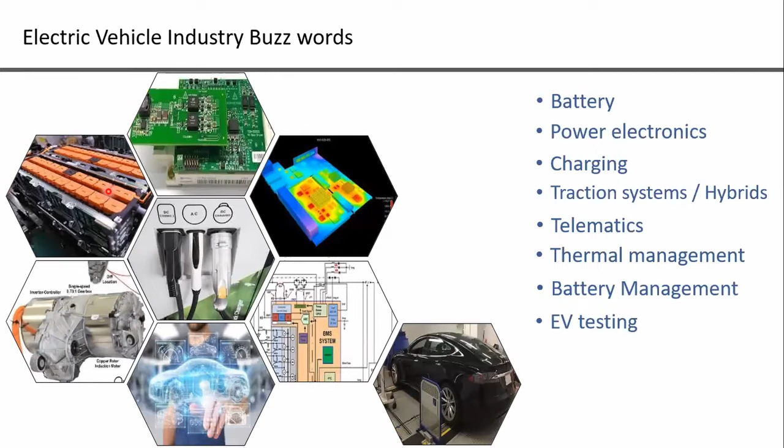Now, when you build an electric vehicle, you also need to test those vehicles. Some tests from an ICE vehicle continue to be applicable even for an electric vehicle, but apart from that, there are various other tests you'd do only for the electric domain—insulation and isolation testing, motor power testing, range of the vehicle because of limited battery capacity, and various EMI, EMC testing—very important in electric vehicle development. So all of those are areas you'd see coming up in the EV domain.

Important—grid balancing. Someone asked this question about charging at home in the last session.

I agree to the point that India in some states are having surplus energy, and some other states don't have energy even for the basic house. Even in Tamil Nadu, we have seen sometimes outages for 1 hour in a day during peak summers. This year, hopefully we're not seeing any outages. But one is availability of power.

The other important thing in India is the quality of power. It's not just related to availability, but how good your power is, the power factor, so that all the electronics I spoke about are very susceptible to the quality of power that goes inside. They are all three-phase AC, but if the leakage voltage or power factors are bad, you might end up not charging it, or you might end up failing the system much earlier in the process. So that grid balancing is one important thing.

Last but not least, like I mentioned at the start of my slide, we talked about battery. This is also a solution of battery, because you can't afford to put large battery packs on the vehicle. There are various solutions that have come up in recent times for allowing batteries to be swapped. So this is one of the batteries that you could remove and put into your vehicle, a two-wheeler, and take it off for running the next ride.

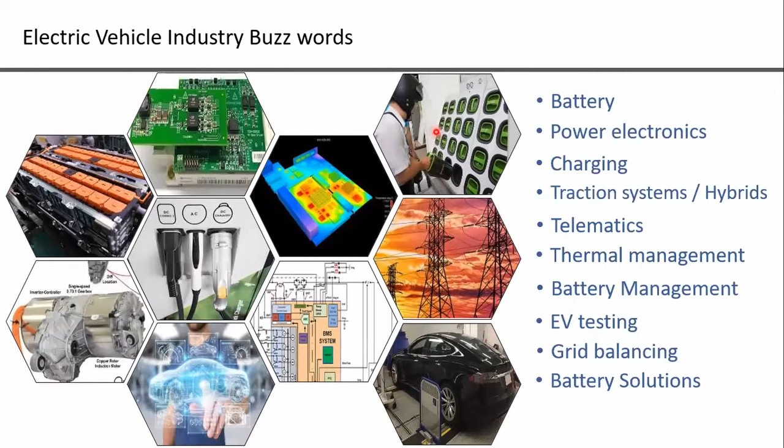Second thing is you are getting batteries for leasing. You don't have to buy the battery. You can lease it for 1 year, 2 years based on your capacity and your utilization, and you pay per use. So there are other various options that you're getting for battery solutions.

So if you look at hybrid vehicle designs, I'm not going to talk because this was well spoken in the last presentation. These are the various resistive forces that the vehicle sees. Now, if you're an electrical or mechanical engineer, the forces acting - rolling, aerodynamic, grade, accelerations - they don't change, whether the wheels are powered using a diesel engine, a petrol engine, or an electric motor.

This is the bottom phenomenon that the motor or an IC engine has to meet, so this is very important. This was spoken about in the last session, so I'm not going to spend time - I've actually hidden some slides out of this because I saw the presenter had already presented this. So all these forces are non-negotiable, because without them you can't make the vehicle propel on the road. So this is the important piece.

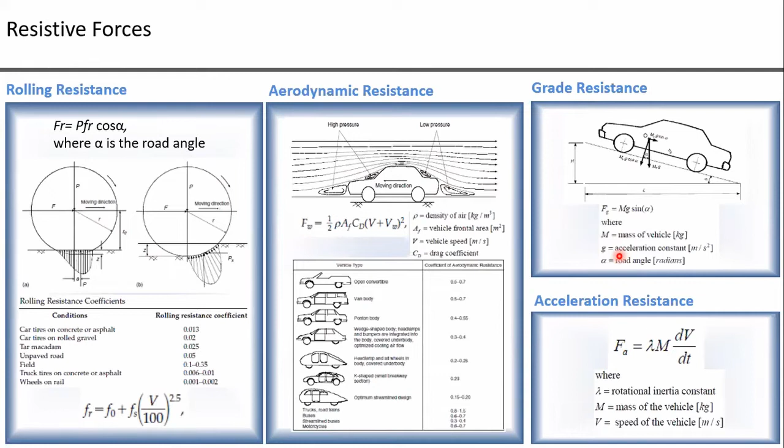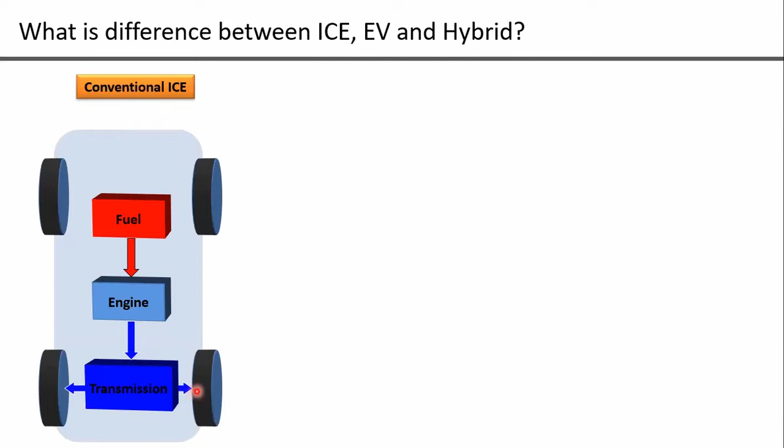Now, what is the difference between IC, EV, and hybrid? So look at an IC engine. This is a textbook definition where you have a fuel, it goes to the engine, and from the engine, the mechanical power goes to transmission, and you see the arrows, they propel it into the wheels. Now, what happens within battery electric?

Instead of a fuel, you have a battery. And the battery gets to the motor, and the motor powers the transmission, and it propels the wheel. You have a double-sided arrow. What it means is when you want to brake or regen, either using coasting or braking, you actually may convert mechanical power through a generator mode of the motor to get electric power to store in batteries. So this is the other extreme of battery electric.

What is the hybrid? Hybrid is a kind of solution that gets you the best of both worlds. You have some efficiency benefits of this, and you're having some other benefits out of this way on efficiency terms. So we're trying to club both of them and get into a hybrid vehicle.

So there could be two ways. One is a series hybrid, wherein the fuel engine charges the battery, and from that it goes to transmission - that's series. And this is parallel, where you have battery going into the transmission and the fuel also going into transmission, whereas regen only happens on this. And therefore you get the benefits of regen into this, and you have idling or cruising speeds at an efficiency using fuel. So there is a series or a parallel hybrid which you get.

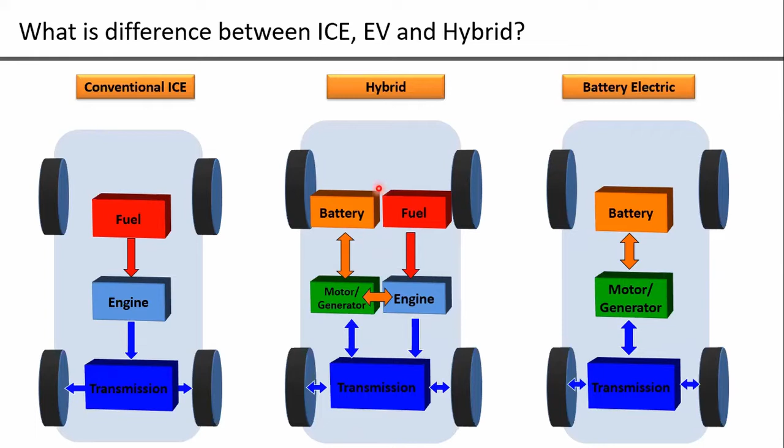So this is only to ensure we get the best of both worlds on the same vehicle. But there are challenges on cost, economics of operation, and things like that - but this is just an engineering concept. Now, someone asked about different degrees of hybridization. This is a good slide that I thought will help everyone understand the difference between the different hybridizations. So on your left side, you see the conventional vehicle, which is a pure diesel or petrol engine, and on this side is a pure electric vehicle.

So you see the amount of combustion engine or IC engine starts reducing, and electrification starts increasing. So what is a micro hybrid?

Micro hybrid is nothing but engine stop start. So during operation, you just stop the engine when it's idling. That's called a micro hybrid. Examples include Mahindra Scorpio or Bolero. If you look at two-wheelers, the Hero Splendor iSmart has this engine stop during long stops at signals. International brands like BMW or Volkswagen Passat are also examples of micro hybrid.

What is mild hybrid? It has the engine stop functionality, but also some amount of regenerative braking. Regenerative braking means you're allowing some of the braking energy to be recuperated into a battery, so you can save some energy. That's called mild hybrid. They are normally, not always, 48-volt systems, either belt-driven BSG, belt starter generator. Those are all types of regenerative braking.

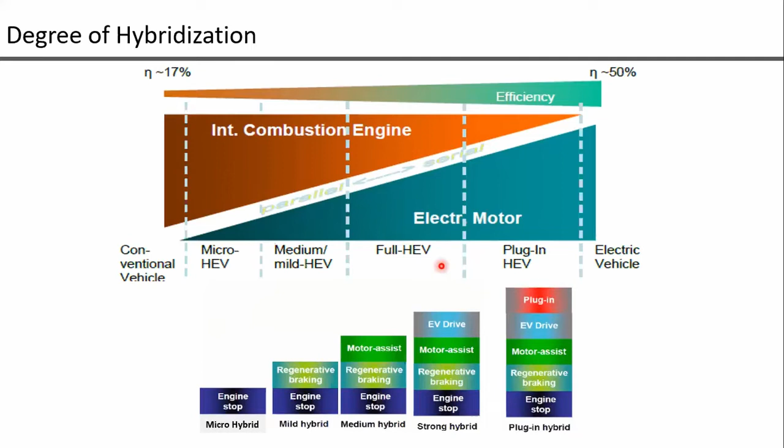And we had Ashok Leyland with an electric hybrid bus called HyBus, you can search for it on Google. That was a strong hybrid made out of ultra capacitors and an IC diesel engine. A plug-in hybrid is the same variant as a strong hybrid, but instead of charging the batteries using an internal engine, you charge them using a plug-in. That's how the plug-in hybrid gets its name, so you'll have a charging socket outside. These are various examples, and this should help understand the different ways to ensure different degrees of hybridization.

Let's get into electric design trends and opportunities. I will start with the various areas or domains that you would have when looking at EV integration.

So first, the centerpiece is the vehicle and traction system. Whatever be your mode of powering the wheels, we need to ensure that the wheels keep rotating. More often, for a commercial vehicle manufacturer like us, the customer gets money payback only if the wheels keep rotating. If the vehicle is down for maintenance or breakdown, that means my customer is not earning money. So we need to ensure that the wheels keep rotating - that's the most important thing from an EV integration perspective.

Next comes the energy storage system. Unlike diesel or petrol engine vehicles where you can refill your fuel tank and start your journey again in a few minutes, we need to make a conscious decision on how much energy storage system sizing is needed for what kind of application. Ashok Leyland, for example, has various different energy storage capacities based on the requirement of the application.

Thermal management - why? Because the traction system needs to be cooled. Even our IC engines, whether petrol or diesel, need a radiator to cool. Traction systems also need this, but the only difference is that it does not have so much heat to be rejected. A diesel or IC engine would run at around 33 to 35% efficiency, whereas traction motors run around 85 to 90% efficiency. So the amount of heat rejection for a motor will be less than an IC engine, but it still needs to be cooled.

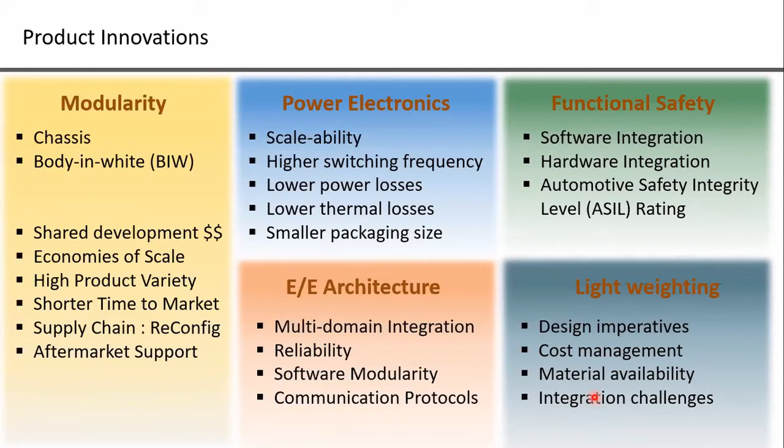Now I'll just have some pictures for what I spoke in the last slide. Looking at modular design, look at this. This is a base platform, right? So you have validated this design, and look how many more variants you could create: a hatchback, a convertible, a mini van bus, or a track car, or a camper car.

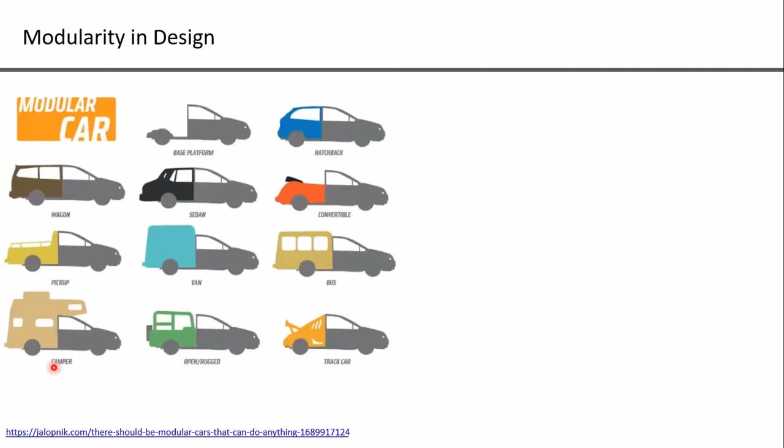So with the same structure, if you had modular design, various aggregates can be made. Now look at the possibility, like I mentioned, serviceability—if one part fails, they are all reused in the same kind of vehicle. So now I have a lot of advantage in my sourcing and development activities.

There are other concepts too, like different systems—you have an engine bay, a cockpit bay, a rear underbody module, and a front underbody. So using these modules, you can fit into various different classes and create so many more variants. This is the CMF, common modular family, that Renault Nissan has done for that development. These are just examples of how you could look at it.

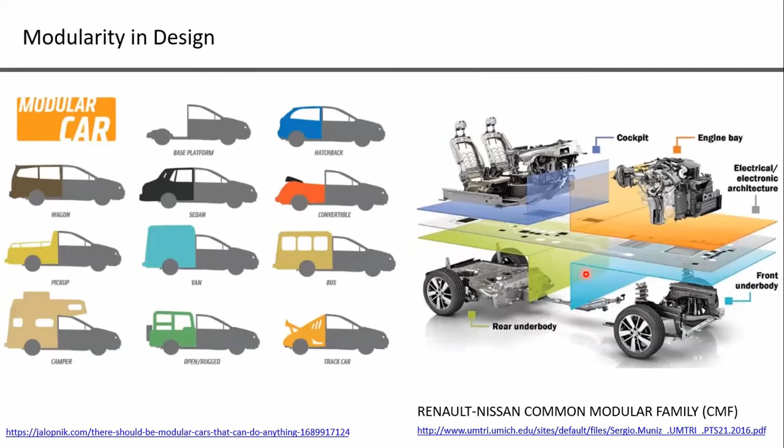The other is EV skateboard design. You've heard a lot of information and stories about how a skateboard design is nothing but a modular system. Now, if you had all your motors, batteries, power electronics, and safety systems packaged underneath like this in a skateboard design, you're free to do any mechanical design on top of this. So this gives an advantage that the customer will feel he has a different vehicle, but under the hood it is the same configuration with the same power electronics.

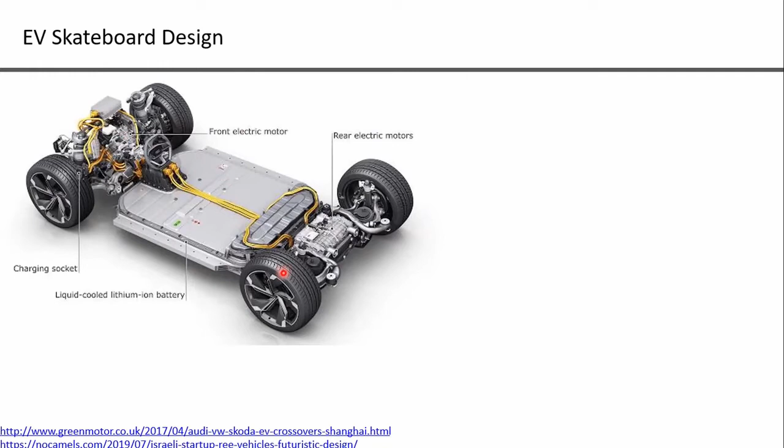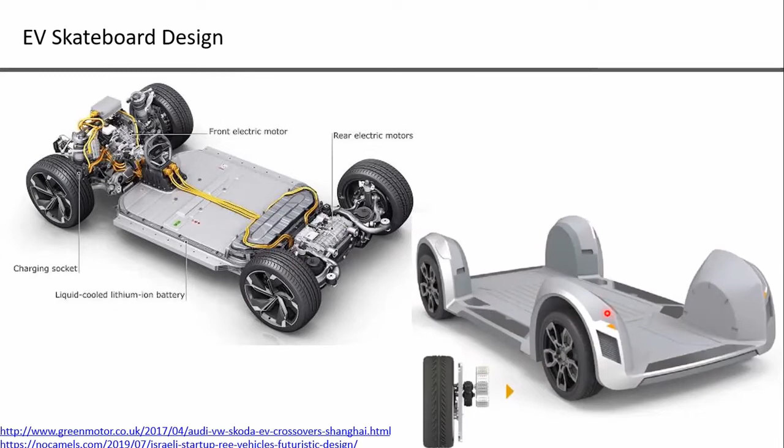The other is REE, which went much further and doesn't even have this—it's a complete flat bed where hub motors are connected to the wheels, and you have power electronics and the battery, everything connected to this on the chassis. So now it allows you to get the complete space for either a commercial car or a personal car.

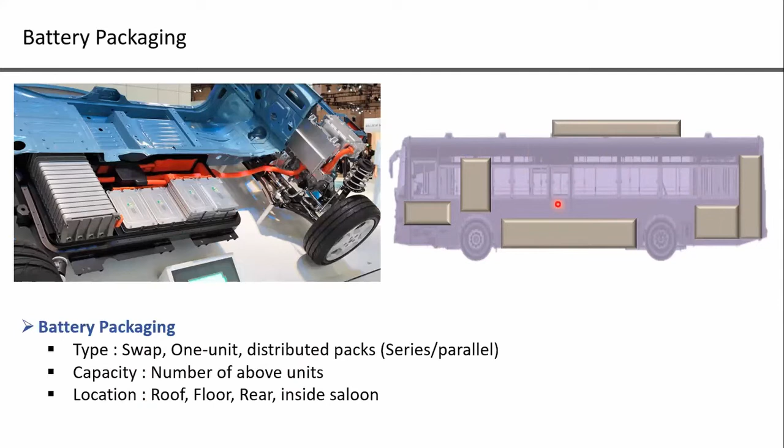Then comes the battery packaging modularity—you see various options. This is half chassis, half underneath body, where you're looking at the batteries here. And if you look at a bus, you have options to place your batteries on the roof, in the underbody, on the rear side, inside the saloon, or in the front where the engine used to be, so that the saloon space, or passenger space, does not get affected because of electrification. So we could have a swap battery, one unit, or distributed packs in series or parallel, depending on the capacity, how many units you want for the range requirement, and various locations.

Next comes the charging. There are two typical ways of charging a vehicle—AC charging and DC charging. We all know the battery is a DC source, so in any case that you want to charge, you need to finally convert it into DC. So if you're having AC charging, that means you're taking power, alternating current from the grid, having an onboard charger to convert AC to DC, and getting it into the lithium-ion batteries managed by a BMS.

If it's off-board charging or DC charging, the charger—this power electronics—is now outside, and you're giving a DC source, which gets directly into the BMS. In this case, the BMS talks to the DC charger to tell it how much power, current, and voltage is required to ensure the lithium-ion batteries are safely charged.

Now, both have an implication. If it's a personal car, you would like to have an onboard charger because you don't want to install a fast charger—so this might be a good option, AC charging for a personal vehicle. But if you look at a commercial bus or an Ola, Uber kind of commercial car application, instead of having the infrastructure on the vehicle, which increases vehicle cost, you might want to keep one charger outside so you can service many vehicles using one charger. That gives you overall efficiency economics in infrastructure development—so that covers the different types.

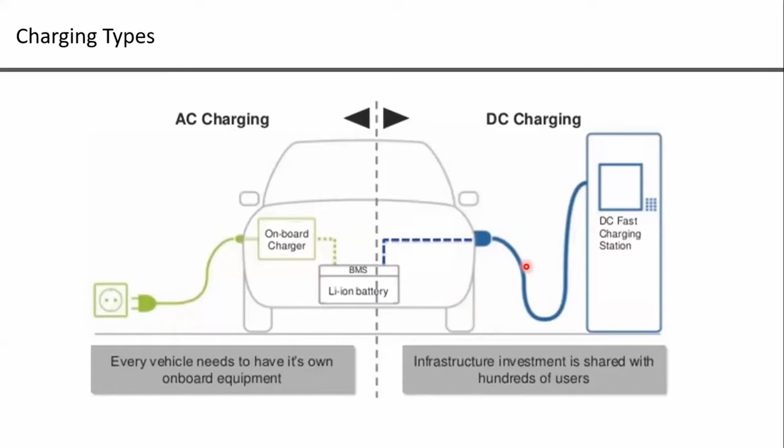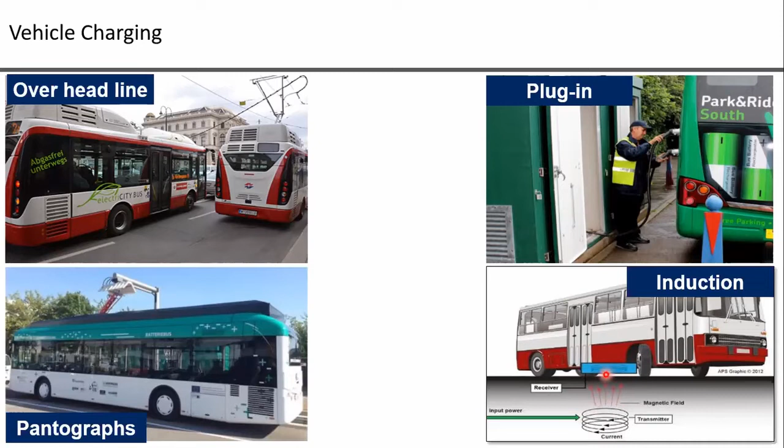Many of you would be using phones which have wireless charging. This is the same principle. Electronic engineers will understand a primary circuit and a secondary circuit to charge power. So the same thing at a very, very high capacity power and current rating is being used.

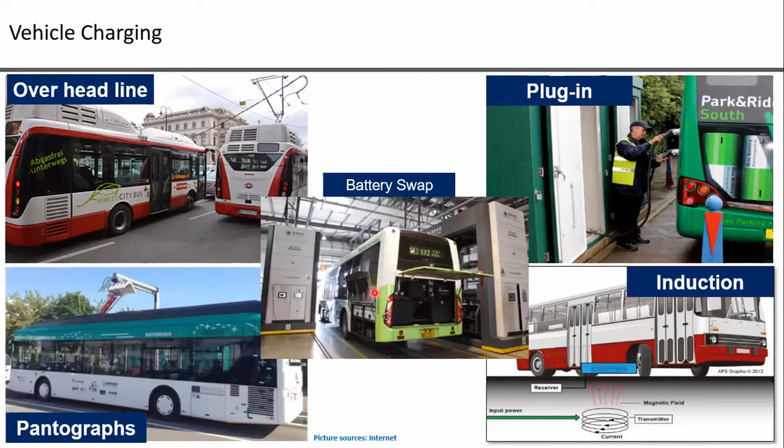Ashok Leyland, if you look at Ashok Leyland, Google it up as Circuit S bus, you will find even the swapping mechanism, how a big battery could be swapped in less than 4 minutes or less than 3.5 minutes to get back. So this is just like fueling your diesel or petrol in 3 minutes and taking the vehicle out. That's one of the concepts that Ashok Leyland did for swapping.

Next comes electrical and electronics architecture. Today, where we are is somewhere between integration and centralization, where several ECUs exist - for example, there is a brake ECU, there is an ABS, EBS, the engine ECU, if it's a hybrid it's a BMS, and there is a cooling thermal cluster. So there are several ECUs which are getting integrated, and more so when you look at electrical.

Today what we see is something like centralized domain control units, where a lot of domains - for example, thermal domain, traction system, brakes and safety, steering and safety - all of them manage those small ECUs. So this is called centralization.

What we are going towards - this is again from a Bosch E/E architecture, what they predict in the future in the next decade or so - is moving more about fusion, where several of these ECUs are getting into fusion, and more importantly, getting into cloud.

You see this flashing over the air, FOTA - flash over the air. Flashing over the air is becoming a common terminology in this domain, and this is something that is available now. Going forward, it'll be more of cloud.

It's not just flashing over the air, but the management of AI would go on the cloud, so that large amount of computation for that vehicle would be done on the cloud, and specific actions are taken on the vehicle. So this is how this has been envisaged by Bosch, and we see more evidence that we are moving towards this idea of architecture development.

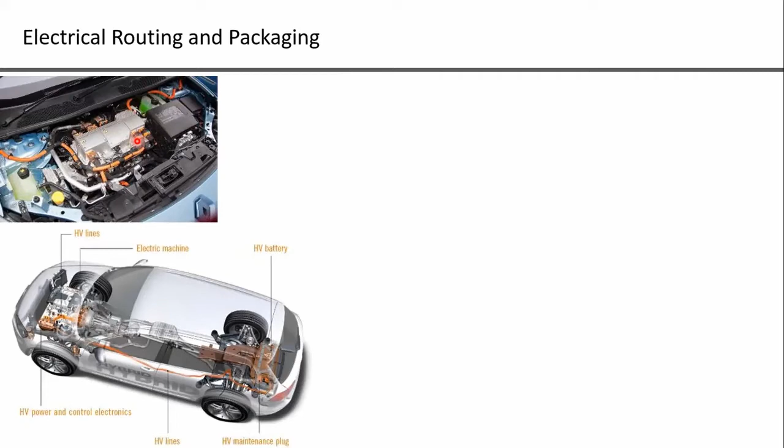Let's look at electrical routing. Coming back on the vehicle side, there are going to be a lot of high voltage and low voltage systems. Anything orange in color on an electric vehicle, be aware they are all high voltage cables - this is an industry standard. High voltage means anything above 60 volts. So all of them would be in an orange color package. That's one important thing.

Also, a lot of infotainment and sensors for autonomous ADAS related things are coming up - rear view, front view. So there's also a lot of electrical harnesses.

Now when you look at challenges, you have high voltage cables and low voltage communication cables, which automatically raises a concern of EMI, EMC. Electrical engineers would appreciate that, from a mechanical engineer's view, it's nothing but noise picked up by low voltage or high voltage electronics because of high frequency switching. In low voltage, this is because of clock oscillators inside electronics like ECUs. In high voltage, it's because of high switching frequency - we heard about 500 kilohertz, 15 kilohertz to 600 kilohertz of switching frequency to convert AC to DC or DC to AC. So they lead to EMI, EMC.

When this noise gets picked up, you get interference, and it might not be a good sign for low voltage electronics to give commands because it's getting noise. Therefore, the commands also will be noisy.

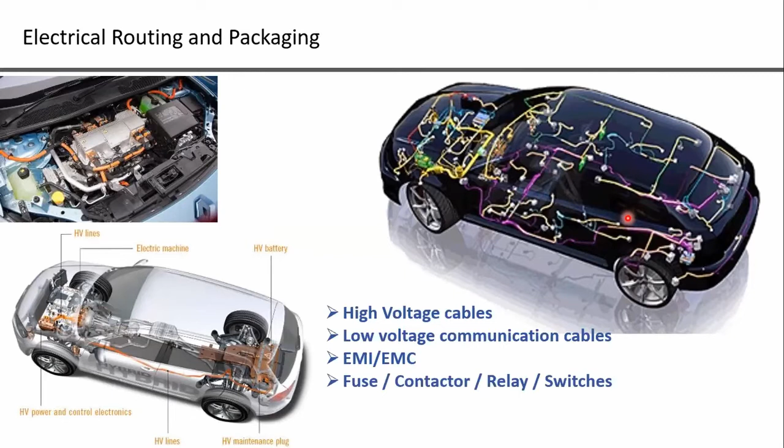Obviously, when you talk about high voltage, you need to talk about fuses, contactors, relays, and switches. How do you design that for the technical safety of it?

Most important is when you have a crash or an accident with an electric vehicle, we need to ensure all the high voltage systems are known to the first responders. Who are first responders? They are either the public who come to help extract passengers, or the fire tender guys, or even service personnel who come to allow the systems to work.

So when you're welding, cutting, or extracting people, we need to know where to cut. By mistake, you should not cut a high voltage cable which is already under stress - if you cut it, you might get electrocuted. So to avoid that, a lot of safety is needed during service and repair.

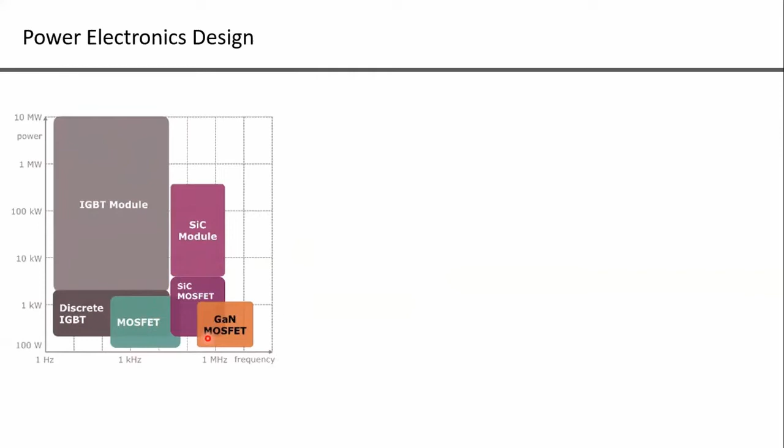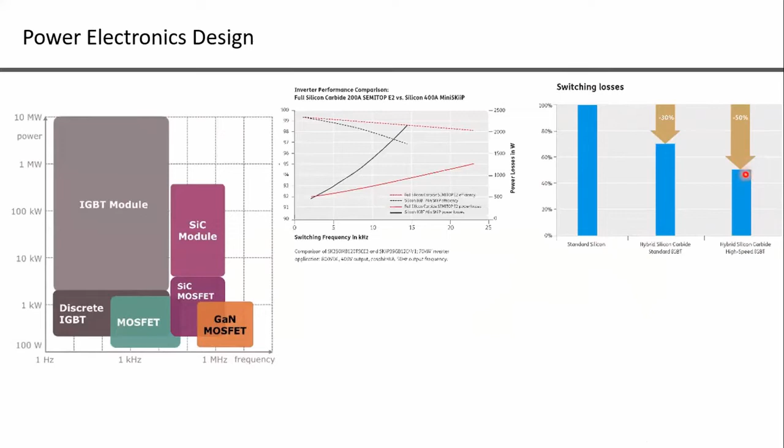Just an example of how switching losses could be reduced moving from standard silicon to silicon carbide - up to 50% losses can be reduced. There's a paradigm shift happening these days in managing the magnetics, the electrical EMI, EMC, and reducing the system cost of development.

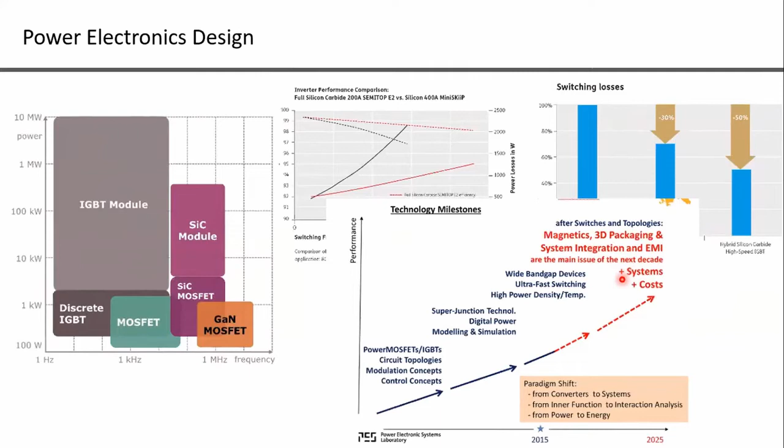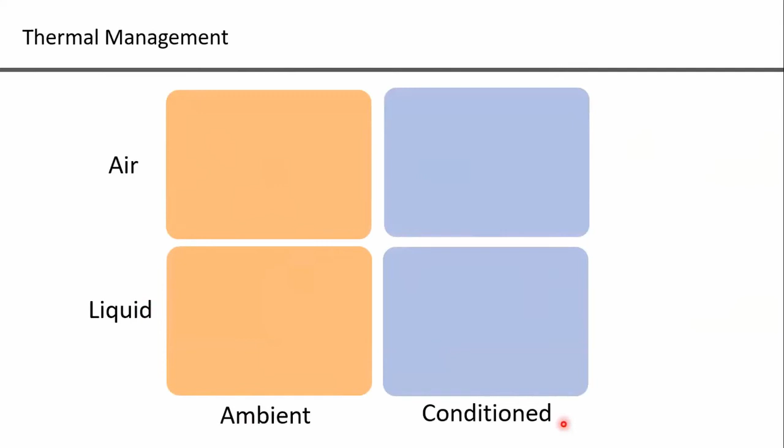Now what are the options? If you had air cooling and ambient, it's nothing but fin cooling - nothing but natural convection. You could have, in this IGBT module, a small amount of aluminum fins to extract heat from it, whereas the power module electrical connections are here.

Or you could have a forced fan to extract heat. That is nothing but forced convection. So it's air and it connects to the ambient.

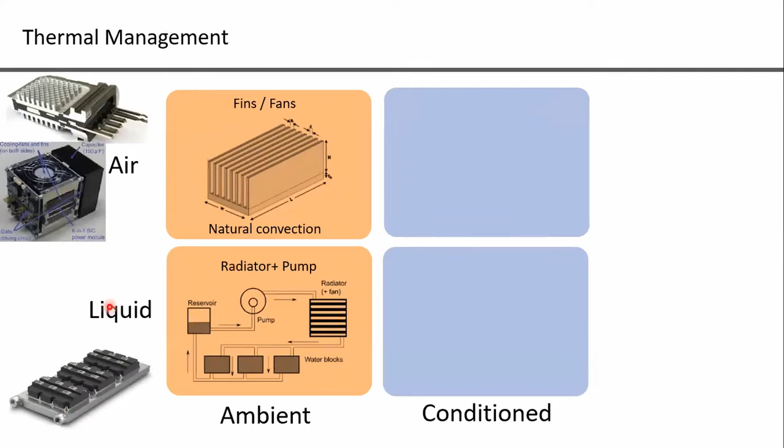What is liquid? You have the same IGBT modules, all black color, with a cooling pad below it. You are taking water, which goes to the radiator, and there's a fan which extracts heat, and it goes back to the power electronic modules. If there are several water blocks for the power modules, it takes care of that. So that's nothing but liquid and ambient, still ambient because you're extracting heat from the water to the ambient air using a fan.

What is air and conditioned? It's an HVAC unit, so you are able to cool the air, and the cold air goes into a battery. This is an example of a battery. You see a blower and cold air, and the cold air goes into a battery module to cool all the packs. It's like a small air conditioner inside a battery pack to allow the cooling of the packs.

And finally, liquid and condition. It's nothing but two circuits. You have a compressor and an evaporator circuit on the gas side, and you have water from the condenser going to the exchanger. So the water and the cold air get exchanged in this heat exchanger, so that you're able to cool the batteries or power electronics.

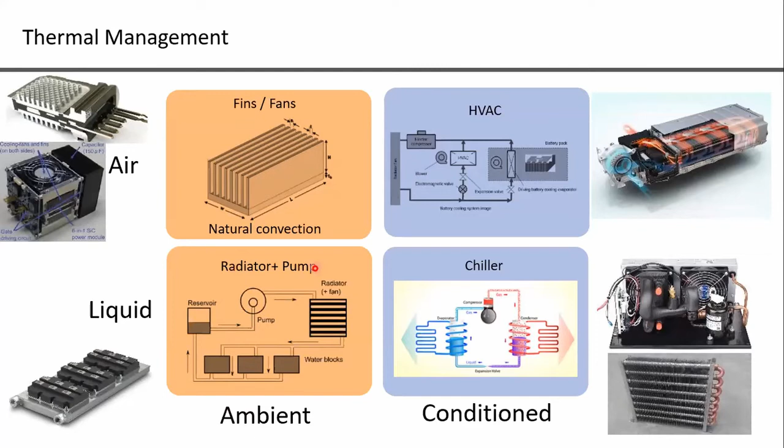So this is a simplistic view of thermal management that we have on a vehicle. You will appreciate that some power electronics could use this, some could use this, some could use this, and batteries would normally be in this kind of category, while power electronics could be either this or this. These are the two things you could look at for development.

Lightweighting has a very big impact. It's a misnomer, like light and heavy, but yes, this is a big impact, because if you look at materials, there are various types, starting from high strength steel, aluminum, carbon fiber, magnesium, titanium, fibers, and various types of foams and plastics. All of this actually contributes to it.

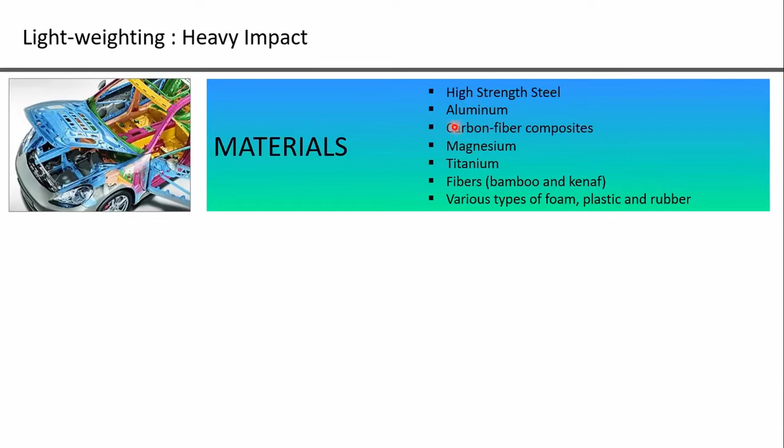This is a typical example where you're seeing different colors, and different colors are areas of each different type. Not all could be steel, not all could be magnesium, because it becomes a cost impact, or involves various joining processes. For example, as mentioned about joining processes, where you need to fasten, rivet, weld, and others, you can't weld a fiber with steel, or steel and aluminum. You might need specialized riveting or adhesives.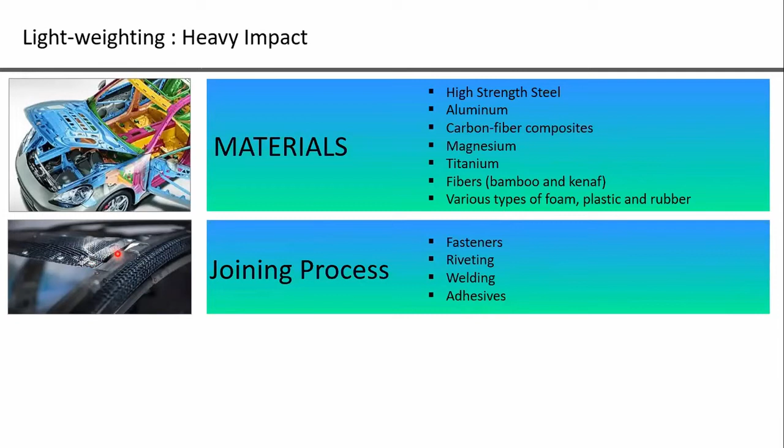There are good adhesives these days. For example, you look at this carbon fiber which is actually pasted on aluminum to increase the strength. So there are various joining processes, and based on this, you would have to decide how your vehicle would take care of this.

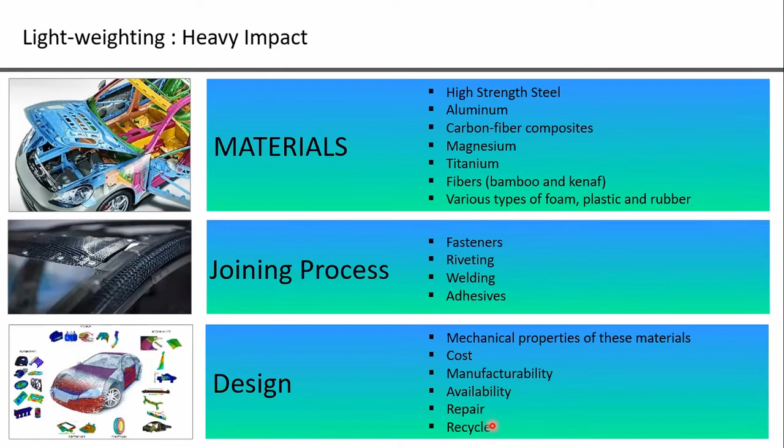How do you repair? In India, we don't like to replace parts, right? We go to a tinkering shop and want to repair it. So if you're having a very exotic carbon fiber or magnesium thing, you might not be able to repair it, which means the replacement cost increases. And most important, which no one talks about, is recycling. As OEMs, we need to be conscious about what materials we use, so that when you scrap that vehicle, we don't end up unable to recycle those components. So we try to reduce items like FRPs and thermosets which you cannot recycle. We would like to avoid such non-recyclable material. That's important when you look at a design perspective.

Last few slides. Am I on time?

On environmental factors for design, you would have understood from this picture. This picture talks a lot in India, even in Chennai, I would see more of this than any of this cooling, since we are always hottest. But when you design a vehicle, you need to ensure that this vehicle would also be used in Ladakh, Leh, and it could also be used in Rajasthan, or in Delhi itself, where in some months of the year it will be hot, and in many other months you might have rain or cold.

We need to ensure the environmental conditions while doing the design work. India is a mixed bag and very different in different parts of the country. You would have highways which are absolutely like a 6-way, 8-way lane with perfect road conditions. At the same time, you'll also have conditions with potholes. This is a normal scenario you can't avoid in your design.

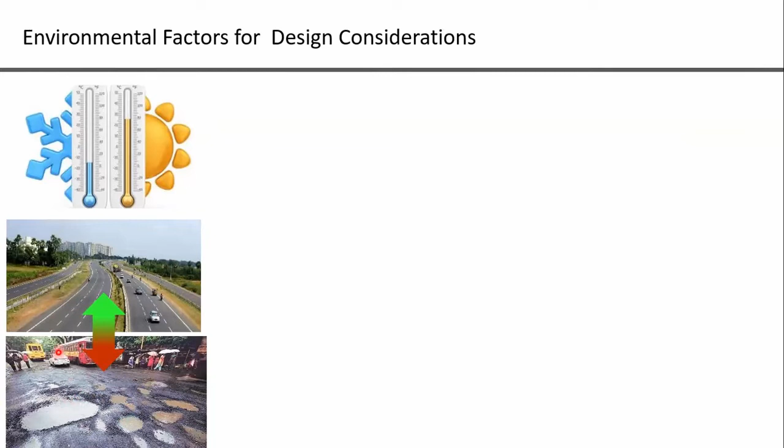You need to ensure that your systems are durable for both conditions, whether it's mechanical durability or ingress protection for water inside the power electronics modules. Water logging, this is a sight from Mumbai. When there are floods, we have floods covering up to the height of a tire, about a meter from the ground. So if you have to package high voltage components, we need to ensure they are protected so that water does not get into the power electronics, because you might get short circuited.

The next is traffic conditions in India. When you look at least for my domain in buses, saloon AC or cars, if you only plan for duty cycle, the battery capacity only for X kilometers and not for time, your energy is zero for propulsion while standing, but energy for HVAC, the cooling system, is always on. Therefore, you need to ensure your capacity takes care of such traffic conditions as well.

Not to mention dust. In the previous slide I talked about convection cooling, but convection becomes a bane rather than a boon, because if dust accumulates on those power electronic components, the thermal conductivity gets lowered, and therefore you'll have problems with the efficiency of those converters. So we need to ensure this is considered when you size or select the thermal system.

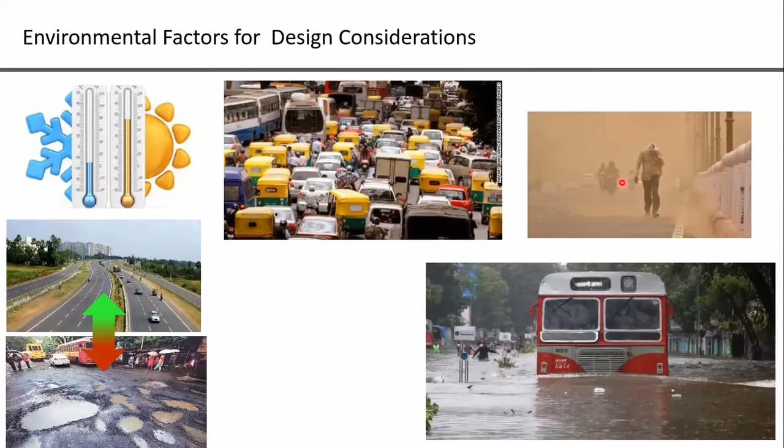Last but not least is driver behavior. A driver who had a good morning might drive with very efficient driving habits. And if he had a bad morning, he might drive very coarsely. These systems, just like diesel engines, get different average efficiencies based on the driver. Electric vehicles also have a considerable effect from driver behavior. So while we sell electric buses, we also have a driver training program to ensure the driver understands how to run an electric bus to get the best efficiency.

As a rough rule of thumb, you may lose efficiency up to 20% just because of driver behavior. A good driver versus a bad driver, you could lose up to 20% efficiency. That means 20% of your range can be lost just because of driver habits.

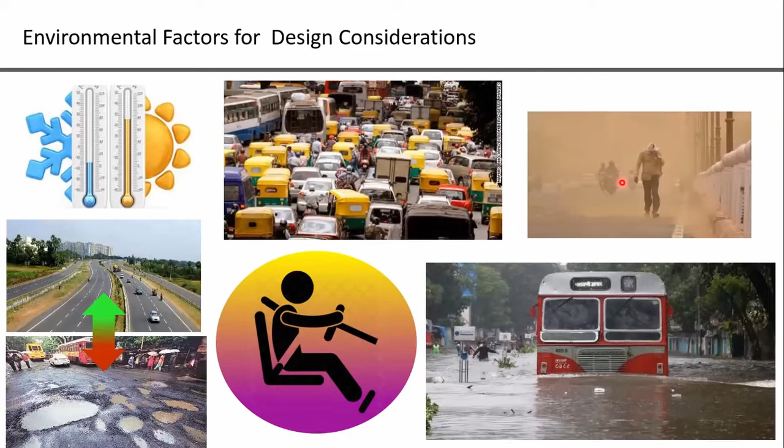Coming to the last part of my presentation, future forward. What you'll see in the upcoming slides is where the next generation of mobility areas is heading.

Parking areas will also become charging areas. Park-and-charge is what you'll see, not just on the roads but also in malls. If you visit a mall in future, you might see a dedicated space with 10-20 bays for charging electric vehicles, where you pay per use. So parking and charging will be an area of innovation.

Highway speedways - this is happening in some parts of Chennai too - using flyovers and high speed lanes just to reduce the distance. It helps at an overall country level to reduce the carbon footprint, because if you had to stand in traffic to travel 1 kilometer, you could spend 10 minutes going over a bridge instead.

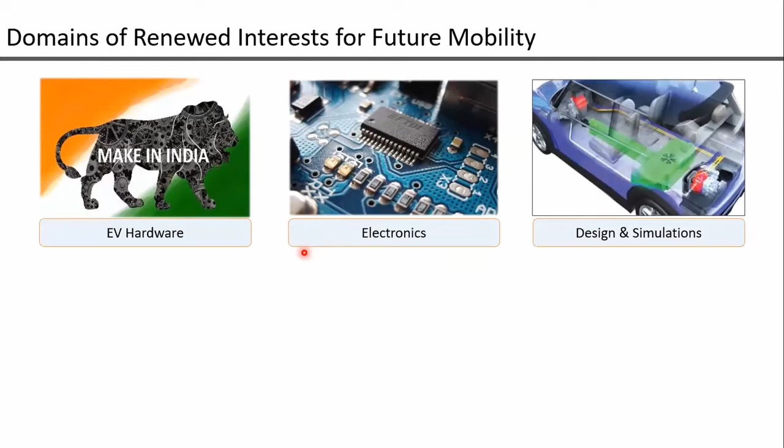Design and simulations - many companies in India are doing simulations and design for IC engines. The same teams are now gearing up for doing simulations and analysis for electric vehicles, whether thermal, electrical, or mechanical - all of those are part of design and simulations. Interestingly, software engineering, which used to be more towards computers and clouds, is now getting more into automotive domains. This is an area where a lot of code is being written for safety, and for interaction between various controls on the vehicle. This is again a domain you can look out for in your future.

Data security and analytics, again from data that is available on the vehicle. You don't want someone to breach your software when you're running at 70 km/h on a highway and tell it to brake the vehicle, right?

If you apply brakes suddenly because someone is playing around with your software, you might get into a severe crash, or someone from the rear could hit you, because they'll assume you're running at 70 km/h and suddenly you applied brakes. So things like that make data security and analytics important in terms of autonomous vehicle driving.

Last but not least, a lot of institutes are doing training these days on how to manage electric vehicles. Today you could go to any mechanic shop and get your diesel or petrol engine vehicle repaired, but you can't do that currently with an electric vehicle, because there are a lot of nuances around safety and controls. So one area that's going to be growing is training on high voltage safety, how to approach a high voltage issue and how to deal with it.

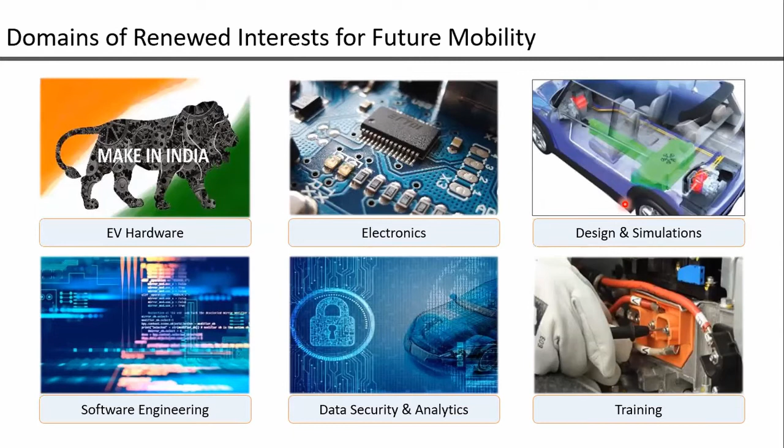First we'll look from a people perspective, how passengers are looking at mobility requirements post-COVID. There's a reduced need to access mobility — work from home, learning from home, telemedicine, e-learning — these are all modes that have reduced people's need to move around. In the last year, we've seen that alternate methods of training are possible, maybe not so much for physical laboratory type work, but many other ways that could reduce mobility needs. The other trend is a new, expanded definition of safety.

Earlier, safety used to mean safety of the vehicle in a crash, or to an extent safety of women passengers on a vehicle, or safety for buses during night travel. Now the focus is moving beyond that towards sanitary and hygienic considerations — whether the buses or cars are sanitized, whether they're cleaned every trip. So there's a different, expanded explanation of safety beyond just physical safety.

Many people have moved from shared mobility to personal mobility, like using bikes and cars. There was a report showing a steep increase in procurement of bikes in the 6 to 8 months post-lockdown, because people wanted to get to office and work using bikes since public transportation wasn't available, and they continued using that. Sale of bicycles has also increased, for two reasons: one is personal mobility, and more importantly health consciousness — people want to stay fit through day-to-day activities, and nothing beats a bicycle for getting physical exercise while reaching your destination.